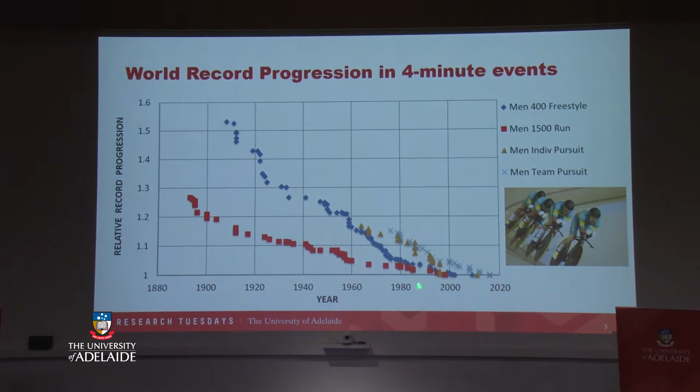So what I've prepared here is a slide with world record progression. This shows the world record for four different events, and I've divided that world record, shown across there for each year, by the current world record. So what we see here for the men's 1500 metres running race is that they've improved by around 28% since the late 1880s. And so it goes for all the others. In 400 metres freestyle, they've improved by approximately 55%, let's say 53%. So all of these are four-minute events, or very close to that, so physiologically they're around about the same.

People's bodies are behaving in roughly the same sort of way, so they're really quite a good comparison. Here we see the 1500 metres running race, and that's a natural activity, and we're all born with the ability to run.

And we see it's a fairly flat progression. There are a few dips and bumps and flat bits due to world wars and things like stadium materials, or stadium running surfaces improving and shoes improving, but it's a fairly flat progression.

In the 400 metres freestyle, we see a much steeper rate of decline in the records, and we can attribute that to improvements in stroke technique. It's not necessarily a natural technique for us to swim, and so improvements in stroke technique have made a great deal of difference, also swimsuits and a number of other factors, and so we see a much steeper decline.

Now there are two cycling events here. One's the men's individual pursuit with the gold, appropriately coloured, and then the team pursuit with the blue crosses, and they both start a bit later, and they show an even steeper decline.

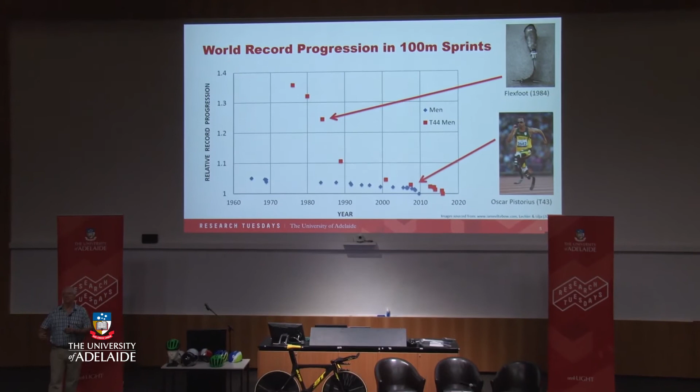Now T44 is for athletes with one leg amputated below the knee, or some other occurrence that leads to them essentially being missing one of their feet. And so they use some kind of artificial foot.

Now, up until around about 1984, essentially people used wooden legs. And so the world records were up here. In 1984, an American engineer developed a leg with a spring and a foot with a heel called the Flexfoot, and that produced that record.

Then they deleted the heel and produced something like Oscar Pistorius used, and suddenly the records dropped, and they dropped and they dropped. Huge improvement.

In fact, Oscar Pistorius, who is credited with a lot of these, as bringing this innovation to the world, in fact he went up a class to this class, to T44, and set that record. But he was just one of many athletes along the way.

What we see here is the effect of technological innovations, particularly in a sport where there are disabilities that need to be taken into account.

So, what does this tell us? Well, we're approaching physiological limits. I hope you agree with me about that evidence. And technological development now offers the best avenue for performance improvements. And in para events, particularly where the human prosthetic or machine interface is really important, we have huge potential for improvement. Okay, a little bit about riding faster.

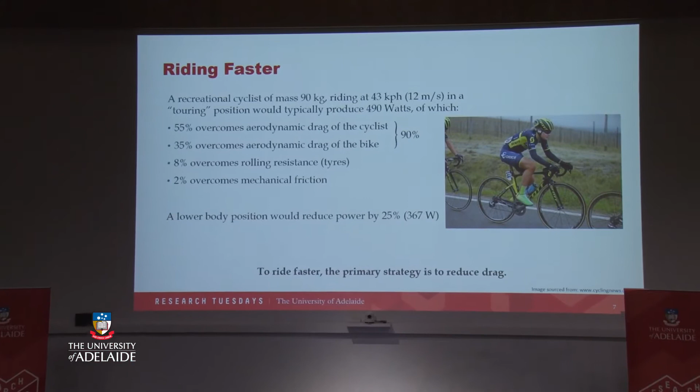So here's an example of a svelte 90-kilogram person of my size. This is really what I wish to be, riding at 43 kilometres an hour along a flat road in what we call a touring position, basically as this rider is showing us. And so a person doing that would be generating 490 watts according to my calculations.

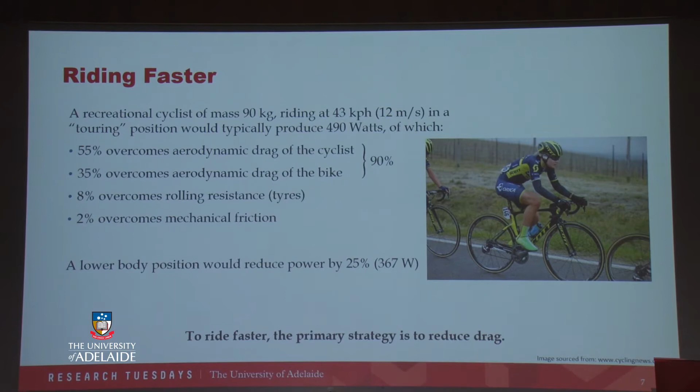Of that, 55% overcomes the aerodynamic drag of the cyclist himself or herself, 35% for the drag of the bike, and the rest is due to rolling resistance of the tyres. So this is essentially friction, if you like, within the tyre fabric, which generates heat, and then 2% for mechanical friction of the chain drive.

If the rider, of course, lowered their body position to be much flatter, they could reduce their power requirement to 367 watts, which is, of course, what most cyclists would do.

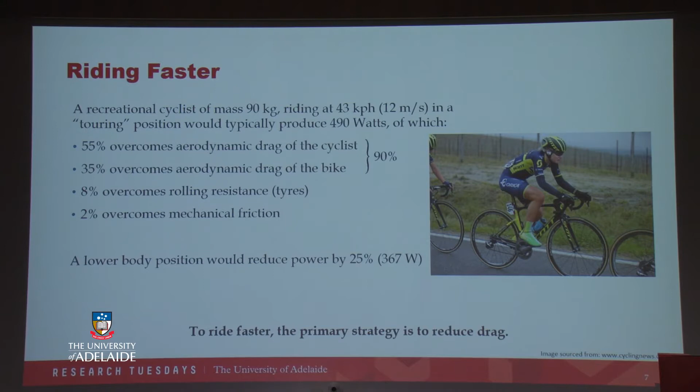What we learn from this is that to ride faster, the primary strategy is to reduce drag. The major component of the total power output of the cyclist is going into overcoming aerodynamic drag.

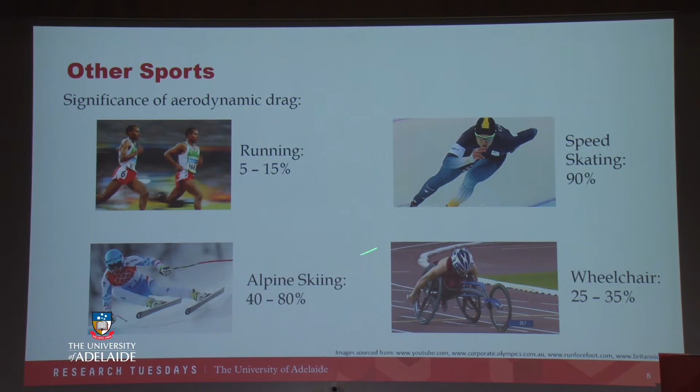There are other sports where this is significant. Running is not so significant, due to lower speeds. Speed skating has similar speeds and position, so a similar proportion. Alpine skiing is somewhere in between, but generally very high due to high speeds. And wheelchair racing doesn't have quite such high speeds, but is still surprisingly fast.

So a reasonable proportion, a significant enough proportion to be worth improving.

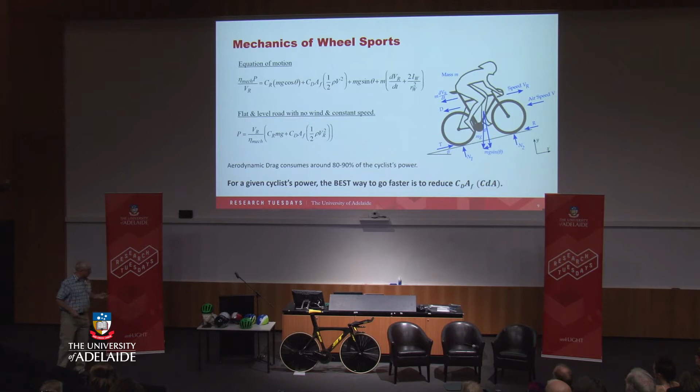So in the end, it's really quite simple. The most important part is CDA. We just need to minimise CDA, and we will minimise the forces on the cyclist. So the best strategy for improvement is to reduce CDA. So how do we do that? Well, the first thing is we reduce A.

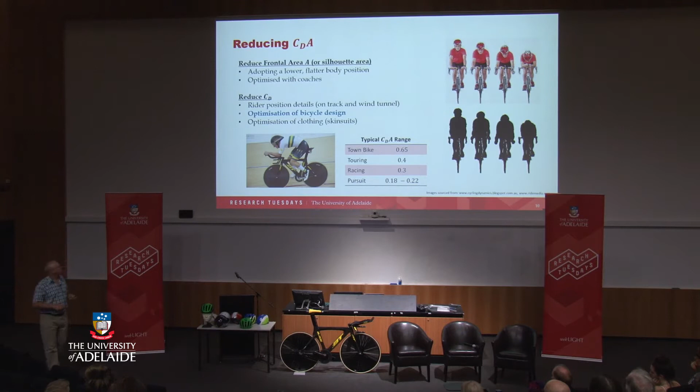We can also reduce the CD, the drag coefficient. That relates to the shape of the flow around the person or object. If the flow remains attached to the body and is very smooth, generally CD is low. If it separates away and produces a large eddying mass of air behind, the CD is large.

So we can control that by changing the rider position - the frontal area is changed by changing the rider position, and that's optimised with coaches. We can also reduce the CD by changing the rider position, things like the angle of the arms and the positions of the hands. And we can also optimise the bicycle design, and the clothing, the skin suits.

Sprinters on the track produce more than 2,500 watts, even 3,000 watts I've heard reports of. Anna Meares - I read an article that said Anna Meares produces 1,800 watts. She may produce more than that for all I know, but certainly that's a very, very impressive figure.

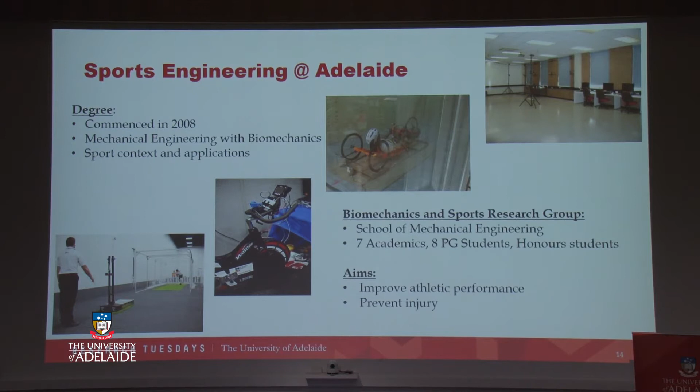We also formed a research group, the Biomechanics and Sports Research Group. We have 7 academics, 8 postgrad students, and a steady stream of honours students every year working on projects within that group. Our aims are to improve athletic performance and prevent injury. It's not just about elite sport - it's generally to improve athletic performance, and prevention of injury is really part of that.

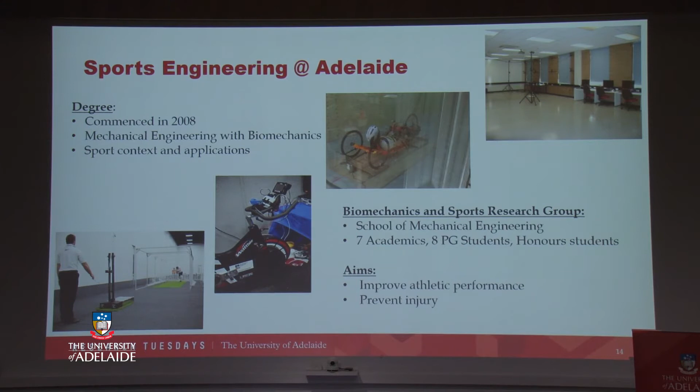That's all of us - I won't talk about who all the people are, but we have a good range of skills within our group of academics. We have a group of fantastic postgrad students, and we also have other contributors from within our postgrad numbers, work experience students, all sorts of people who've really helped us move forward.

And we have very strong collaborations - with the Australian Institute of Sport, Cycling Australia, the South Australian Sports Institute (SASI), and the Australian Paralympic Committee. All of these organisations work with each other in various ways - it's really a big collaboration. We also collaborate with Scott Sports and Bora Hansgrohe, and through Cycling Australia with CASC and a local engineering company, Askell. So it's all very, very fruitful.

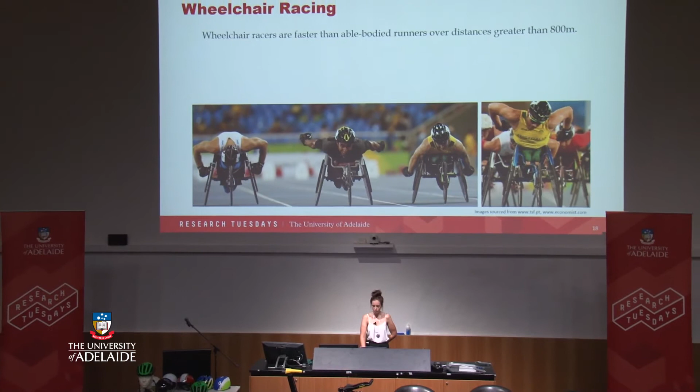Athletes commonly assume a kneeling position and use a striking motion. It's important to recognise that athletes don't actually grab the wheel, they're just hitting it. These athletes can reach really high speeds, and in fact over distances greater than 800 metres, wheelchair racing athletes are faster than their able-bodied counterparts. There are two main schools of thought for what propulsive technique athletes should use.

As Richard has already highlighted, at high speeds aerodynamics are quite important. The athlete on the left of the slide uses a propulsion technique advantageous for aerodynamics - they stay low, however they compromise how much time they're contacting the wheel and therefore how much force they're transferring to the wheelchair. Alternatively, athletes can use a position which promotes power generation, shown on the right of the screen. For this position, athletes substantially compromise their aerodynamic advantage, but are able to apply greater force over a longer push range.

So an important question is: what aerodynamic strategies do wheelchair racing athletes employ? I did an analysis on the 2016 Rio Paralympic finalists, where I grouped each of the athletes into one of three classifications based on their trunk position.

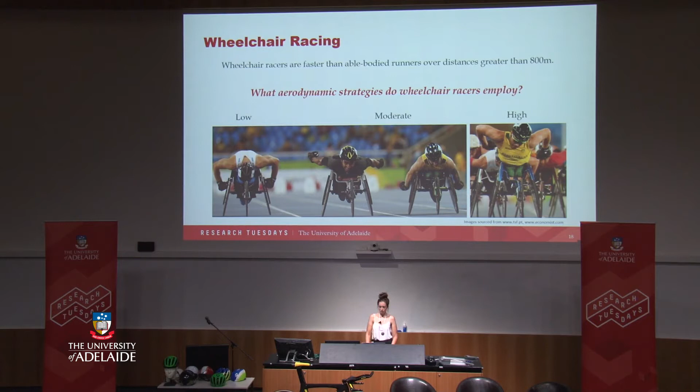One being low, one moderate, where they start to elevate the trunk, and a high position where we see large amounts of trunk elevation. Looking at the results from these finals, for females, the athletes finishing in medaling positions—1, 2 and 3—most frequently adopted low positions. However, for the males, there was a more even distribution of low and moderate positions, with high positions seen very infrequently.

So from this we could see that for the female athletes, aerodynamic strategies were important. However, these were less important for the males in winning a race, possibly due to the greater strength that males have, allowing them to overcome the additional resistive forces. So if it's not for aerodynamics, how else as engineers can we improve the performance of these athletes?

We first think of equipment. Although we've seen major advancements already in the equipment and frame design of wheelchairs, we still are limited, mainly due to how unique each of these athletes are and how limited we are in using commercially available equipment to fit their unique attributes.

So a current limitation for wheelchair racing athletes is in the seating bucket. How many of you have ever tried to run a race in a pair of shoes that are 3 sizes too big? None of you? That's what it would be like for these wheelchair racing athletes.

These athletes have either amputations or substantial muscle loss in one or both legs, meaning their seating bucket is too large for them. As a consequence, they can move relative to the seat, making their motions less efficient. It's possible that because of this movement they're not contacting the wheel optimally, and it's also possible they're getting blisters and lacerations from the frictional rubbing. None of these are beneficial.

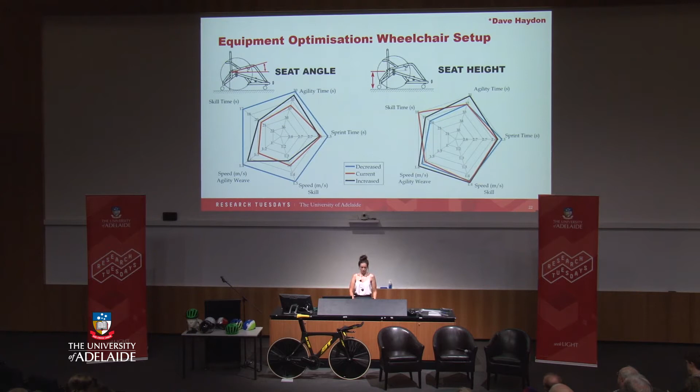From this testing, 6 elite players decided to order new wheelchairs, and the players all wanted to implement the changes before they were even given the results, demonstrating how beneficial this research was to them. There were also really excited coaches who commented on how much more effective and quicker using research was for these processes.

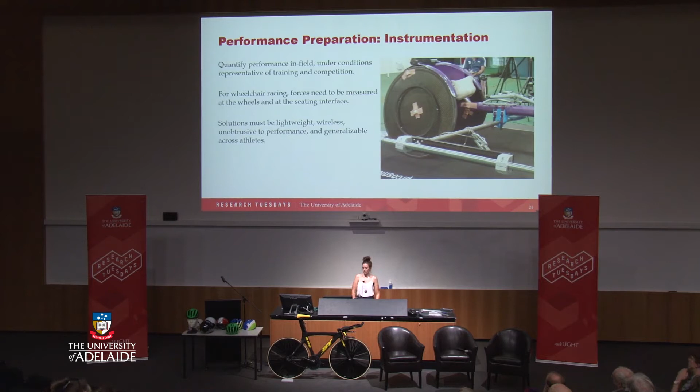To be able to identify these changes, we need to understand what the changes are. I'm sure many of you have been told in the past, practice makes perfect. But what is perfect? Without numbers, we don't know what we're trying to optimise and what we're trying to go towards. And so for those reasons, we need to start getting data.

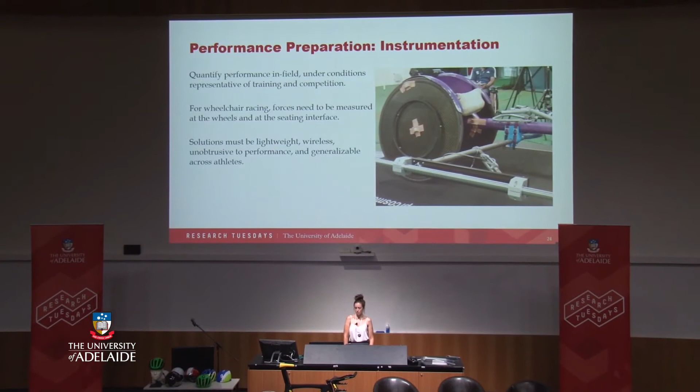That's why we're putting sensors onto a wheelchair. It's important that we can get these in field and under conditions representative of normal training and competition, so we can improve their performance under race settings. These need to be lightweight, wireless, unobtrusive to performance, and generalisable across whole teams and athlete squads.

For wheelchair racing, forces need to be measured both at the seating interface as well as at the wheels. Typically, research has looked at just the interactions between the hand and the pushrim and how to get the greatest amount of force towards propulsion. However, one thing that we looked at was what the seating interfaces were actually doing towards performance.

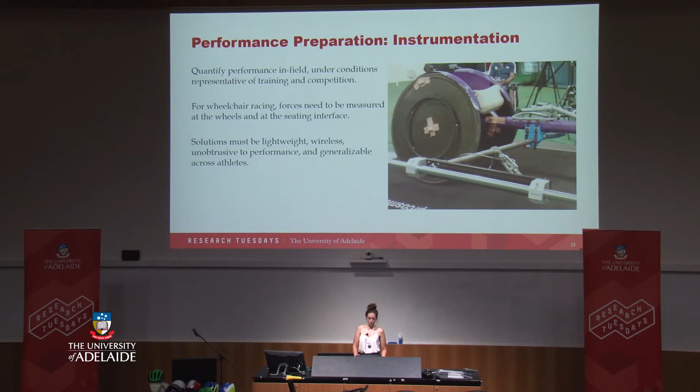So before we look at some of the results, I just want to highlight the 2 key phases of wheelchair propulsion motion. Firstly, there's the propulsion phase, where you're in contact with the wheel and applying force to the wheelchair, as well as the recovery phase, which is between each stroke, and it's where the athlete realigns their body ready for the next stroke.

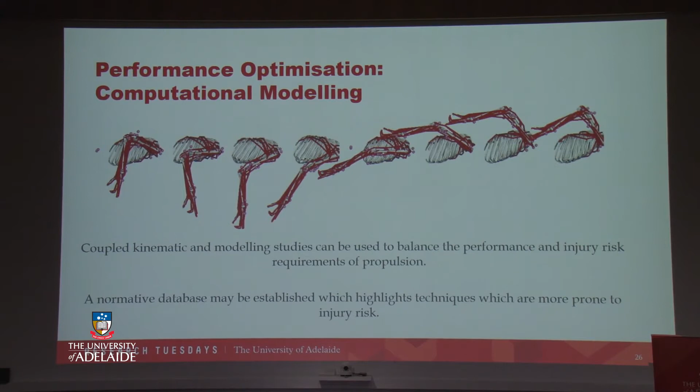Instrumentation on its own can help with defining the efficiency of a motion. However, it's also important to understand the injury risks associated with a motion. So with computational modelling, we can start coupling the kinematics, so the movement patterns, with the forces that athletes are applying. And with this, we can start balancing out the performance and injury risks of motion.

So we can see in the slide behind me some graphics of a simulation of a wheelchair racing propulsion, with the red elements representing the muscles. When you start looking down at a muscular level, we can look at what muscles are being recruited for a task and understand the efficiency of the motion and whether we're recruiting the largest and most effective muscles. And we can also see how much strain we're putting each of them under and whether we're likely to put them under a risk of getting a strain injury.

From this sort of research too, we can start developing a normative database which can help us understand which techniques are more prone to injury risk and which techniques are more competitively advantageous.

So what we were able to find between this case study was that the less experienced athlete had higher propulsive forces but a lower velocity, which was indicative of them having a lower efficiency motion. However, this athlete was also able to have lower joint reaction forces, and so somewhere in their kinematic patterns, they were able to reduce the stresses at the hands and have a safer motion with less risk of injury.

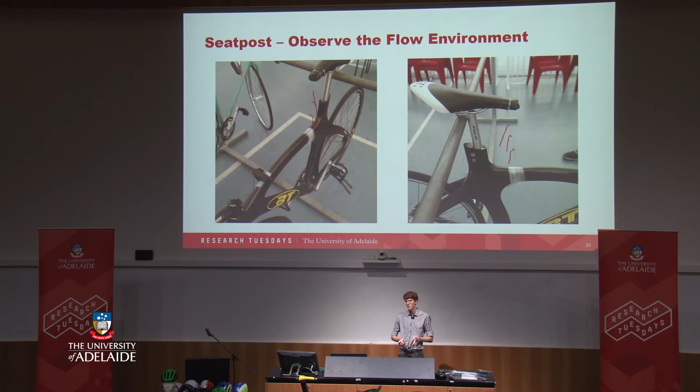This is a very simple experiment, but it works incredibly effectively at seeing what actually happens. On the right, we've got wool tufts stuck on a fishing wire between the saddle and the top tube. On the left, there's a GoPro stuck along the top tube, so this camera looks straight back at the cyclist's legs. This is what we see. It's not the most flattering of images, but it provides a very good indication of what the airflow is actually doing. We can see the red wool lines go back and forth. The airflow remains pretty much the same magnitude and velocity, but it is highly periodic in its direction. It matches the pedal cadence, and these guys are pedaling at over 120 RPM, so it's oscillating back and forth at quite high speeds.

Now the problem is, track cycling takes place inside an indoor velodrome. So the basic assumption everybody made was they're riding around a box in still air. However, we can clearly see here the air is not still, at least for this section of the bike anyway. So all previous testing done on the seat post would have considered just straight airflow. We can see that it's obviously different, so this will affect our results.

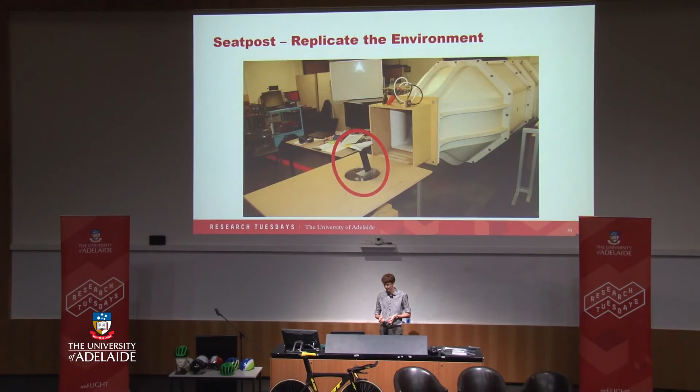So we replicate the environment in a wind tunnel. This is a very small wind tunnel, and it just has the seat post in it, so we've got no legs or bike, but it's really all we need. We have a small wind tunnel and small components so we can tune in on just that area and see what's actually happening at that one point. Here we can turn the seat post through a number of different angles, so we have straight airflow onto a turning seat post. On the track, we have a straight seat post with turning airflow. They both have two different methods to get the same result.

This is pretty much our experimental process. We start with the baseline result. We have a wool tuft, which is just a little bit of wool on the end of a stick, and that can actually show how the air is going, because air is invisible and we can't see what we're doing. We can directly measure the drag force live, straight out, so we can make some changes and see what it does.

We have a lot of fun with plasticine. It's a bit more science than giving a toddler plasticine, because we can mould different shapes to what we want. We can experiment with the wool tuft and see the live drag.

Once we have a bit of an idea, we can get into 3D printing. We can create new profiles, essentially creating an aerofoil, the exact same as what you do for aircraft wings.

I created an entire computer program that used 70-year-old equations to create aerofoil profiles to make a new seat post, and we automated this so that we could be in the tunnel one morning, decide we need to change something, and within 10 minutes we'd have a new model. 16 hours later on the 3D printer, we'd have it ready, and the next day we'd be back in the tunnel testing a new idea.

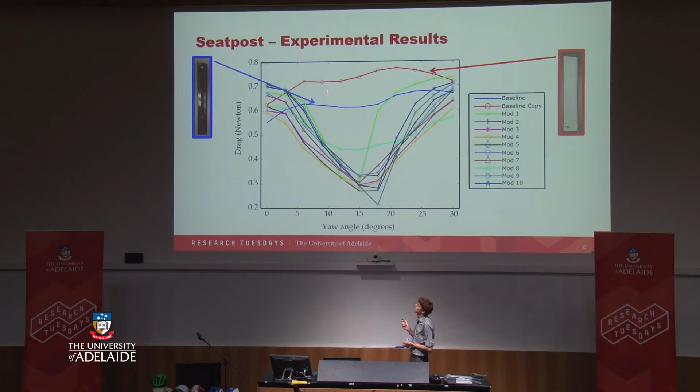A finished product that's done nice and smooth should always be better. So all our other results should really be dropped down by the difference between those if they were going to be made in a final product.

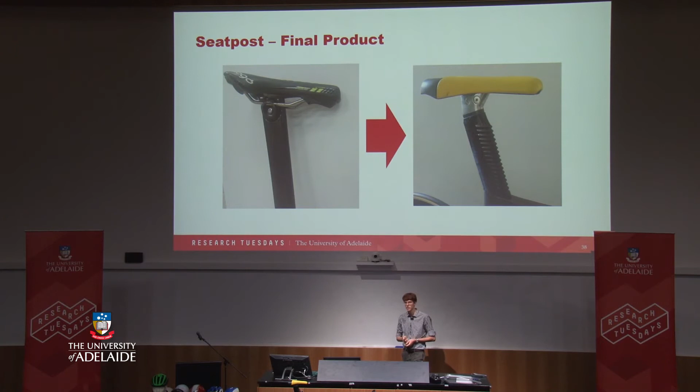And the final result, with a new saddle designed in collaboration with Cycling Australia and Adelaide Uni, we're able to effectively halve the drag of a seat post, which is quite a significant result.

So moving on to the socks, this is an interesting little story that I quite like because lots of people ask, why do you bother? Well, at this level, every millisecond counts and our legs are remarkably inefficient, and we can make a massive difference, as you will see in the end.

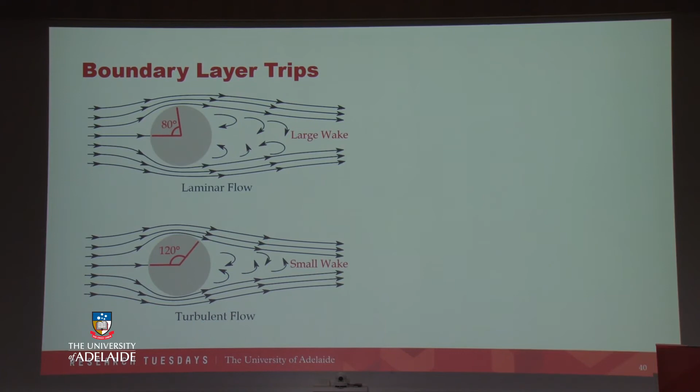This large wake is slow-moving air, and the larger it is, the more drag it produces. In contrast, if we have turbulent airflow, it separates much later, so we have a smaller wake which reduces the drag. So in cycling, we want turbulent airflow.

And how do we get that? We trip the air. We put a little bit of obstacle along the surface, and we can add more energy to the air, increase the mixing, and reduce the size of the wake.

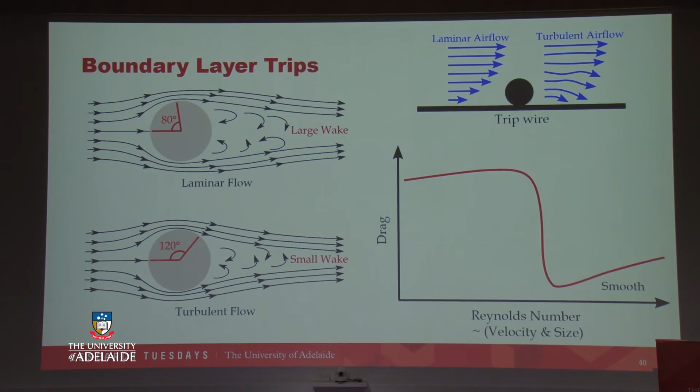So here is a graph of the drag of a cylinder versus the Reynolds number, which is the velocity of the air and the size of the object. We can see at low velocities it has high drag, but it reaches this significant point where it drops suddenly and the drag decreases, known as the drag crisis.

Except in cycling, for the thigh, which is a larger object than the calf, the thigh is right on the drag crisis, so we reduce the drag significantly. That's good. But for the calf, it's right in the high drag area.

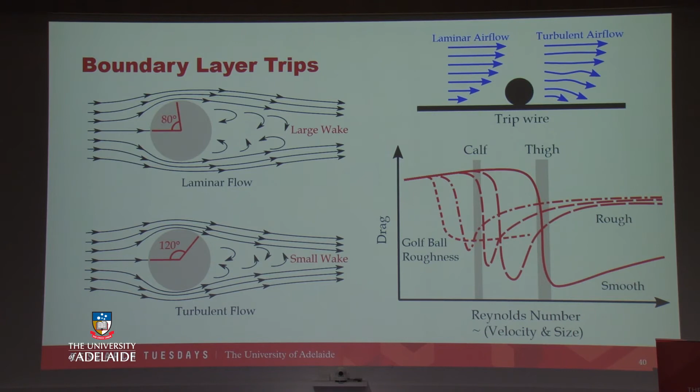But if we add a little bit of roughness and keep adding a bit more, we can move that drag crisis to happen at a lower velocity. So we end up having the area of the calf at low drag. This is what we want, and this is what's used throughout different areas of cycling.

For us, we worked with socks. We put a wire on the edge of a sock and moved it about to find the exact right position, and we got significant drag reductions. But move it a centimetre or so, and there would be no drag reduction at all. So the position was highly important.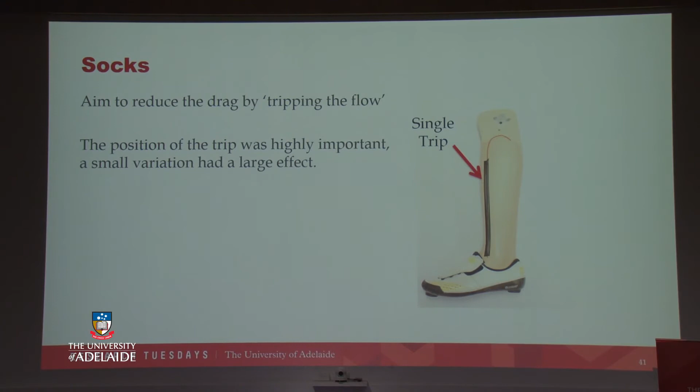Lastly, we did the cranksets. The cranksets are the point where you add the pedals, you add power to the bike. The interesting thing about them is they rotate 360 degrees, which means it's very hard to do anything aerodynamically efficient. So we had a testing setup in a wind tunnel.

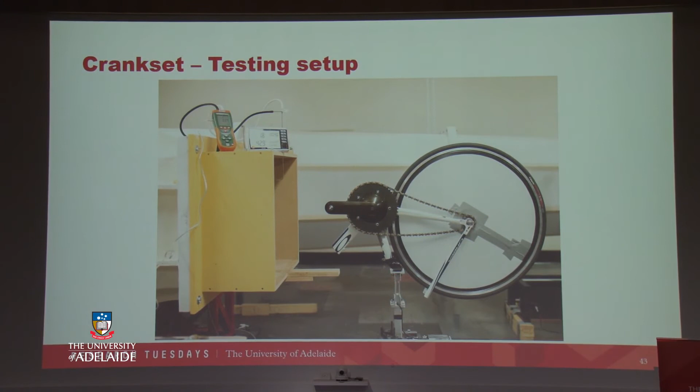Once again, small wind tunnel, half a bike, but it gives us all the information we actually need to know. We'd find a drag reduction at, say, position B, and it would be all good. We'd move to position C and it would be worse than before. So the hard part here was trying to mould the cranksets to work at all 360 degrees.

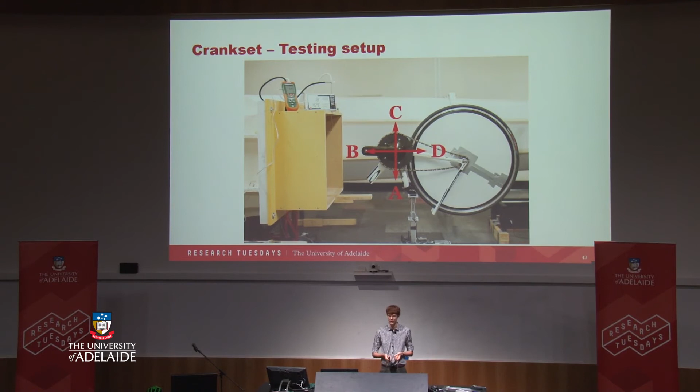We once again had fun with plasticine. Some of these ideas are quite frankly ridiculous and would never actually be implemented, but they allow us to see what's actually happening. We can mould it on the non-drive side to look like the drive side. We use the little humble wool tuft - Richard's favourite wool tuft right there - and we can see what's actually happening to the airflow. This gives us a good idea of what's happening, why it's happening, and how we can influence it.

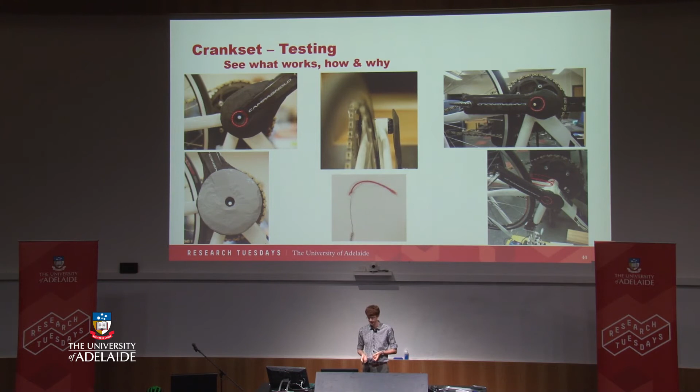Our final result was to keep it very, very simple, but that's the whole point. We cleaned out everything. We found particularly the underside was important, as we wanted to clear as much space between the cranks and the frame so the airflow had room to move around.

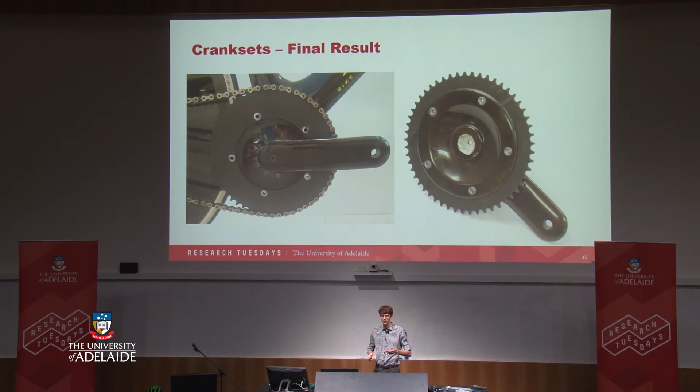Collating them all, we actually got a 27 watt reduction, which is ridiculously large for the amount of work we did. This is a 2-second difference over a team pursuit.

However, the results don't always translate from the wind tunnel to the track for a number of reasons, because the wind tunnel isn't always fully representative of the track, and we're always dealing with the ideal case. That doesn't mean wind tunnels are useless - it means that's actually what they're entirely designed for. We build a wind tunnel to focus in on one area to get the biggest reduction there, and then we can apply that in a smaller manner on the track.

This leads into my PhD work, which is understanding the airflow around a cyclist in the velodrome. With this, we can translate results from the wind tunnel to the track much more easily. We need a greater understanding of the environment inside a velodrome, and this can be used for a variety of areas, not just bike design - it can be used for athlete position and coaching styles. My work involves using measurements from inside the velodrome to build an understanding of the airflow around a cyclist, and will hopefully be used later in the wind tunnel or in CFD to reduce the drag of the cyclist. Thank you.

I'll pass on to Richard.

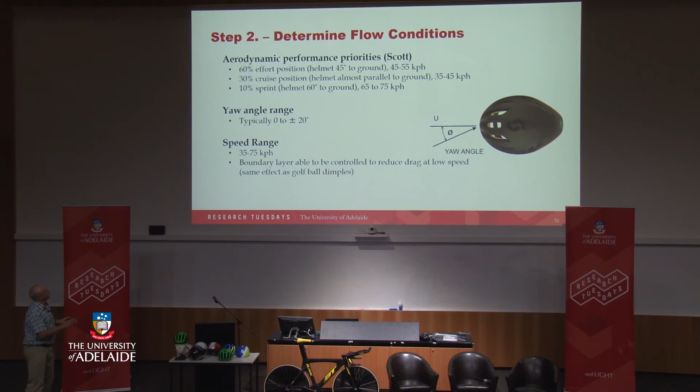As Sean said, at the start of each of these projects, you have to work out the aerodynamic environment. So in conjunction with Scott, we defined three positions of the head and helmet. First one is the effort position — that's the position of the head and helmet when a rider is really pushing hard, so their body will be flatter and they'll be facing a little bit more down, head down.

Relatively high speeds there, and the priority was 60%. If you want to put a weighting on all the things we were looking for, 60% of the priority was on that position, 30% was on the cruise position — that's where you're sitting in a pack of riders, heads up a little bit, generally going a little bit slower. And the other one is the sprint.

This is a Caleb Ewan kind of thing — head down, body really flat, going hell for leather at top speed. So less preference there, but I had my secret preference. It went 0, 0, 100 because I wanted Caleb to win, and he has.

The other thing is the yaw angle range. When you're riding along, there are environmental winds, and those winds turn the airflow to the side — that's called the yaw angle of the flow. So we considered on the road up to about 20 degrees of yaw angle, and we tested at those ranges of angles.

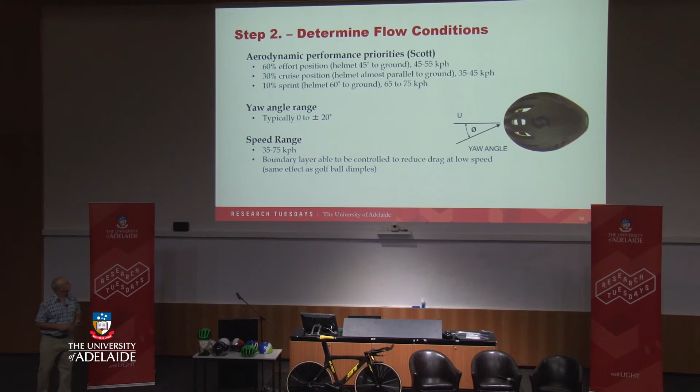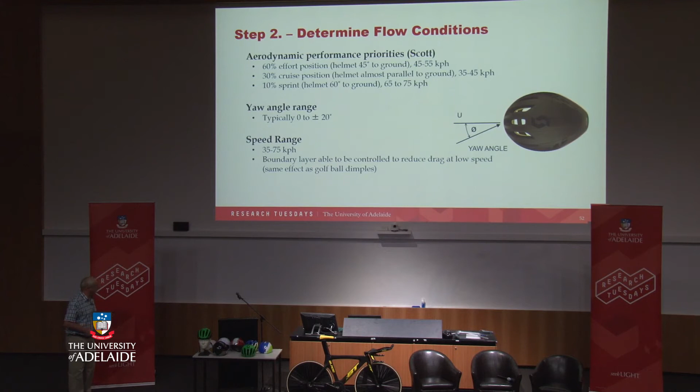Now, we had a range of speeds there, 35 to 75 kilometres an hour. And what was actually really interesting, and it's actually a fantastic result, is that with the helmet at that normal size and speed, you can actually control the boundary layer, as Sean pointed out, by using roughness. Like with a cylinder or a leg with a sock and so forth, you can control or at least reduce the drag on the helmet by using roughness, or, as shown here, little grooves in the surface, which effectively produce a similar result. So we have a lot of opportunity to control the flow and reduce the drag.

Now, I'm an aerodynamicist, and I don't really do much heat transfer work. So I had a lot of fun generating a mathematical model which I used to essentially take my brain out of my lack of understanding out of the equation.

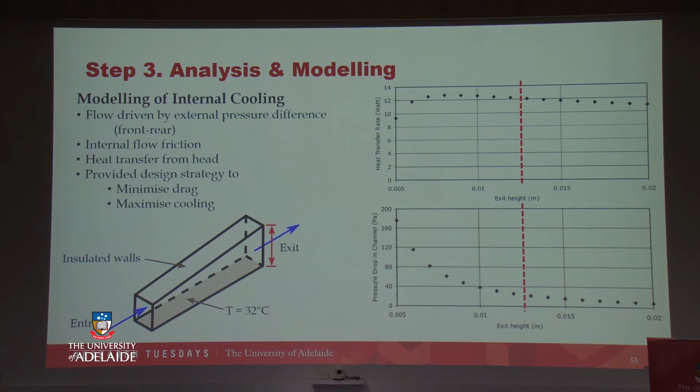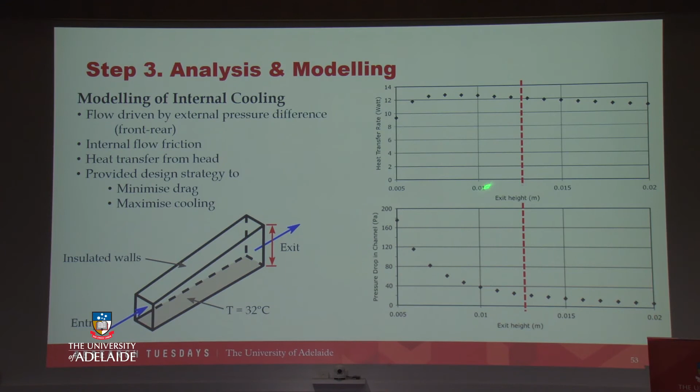Now, it's a bit hard to read what those axes mean, but what we actually see here is the heat transfer rate, in other words the cooling effect, versus the height of the exit. The inlet was 0.01 metres, or 1 centimetre, high, and we find that when the exit is half of that, we have low heat transfer rate, and we actually get the maximum when it's about 7.5 or 8, and then after that it drops down, but not very much.

The pressure drop in the channel really represents the resistance to flow through, and we want the minimum resistance to flow through so we get the maximum flow. What I found was that if you diverge the channel from 0.01 to roughly 12.5 millimetres at the back, we get actually quite a large drop in the resistance, and so we get a good flow.

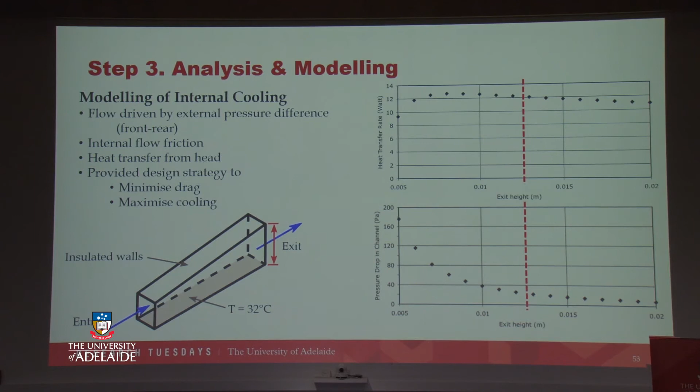So around about where this red line is, you get really good heat transfer, good cooling, and you also get very little resistance to flow. So that's kind of the sweet spot, that was my determination. So if we actually just diverge those channels a little bit, we can have our cake and eat it. We can have good cooling and also low drag.

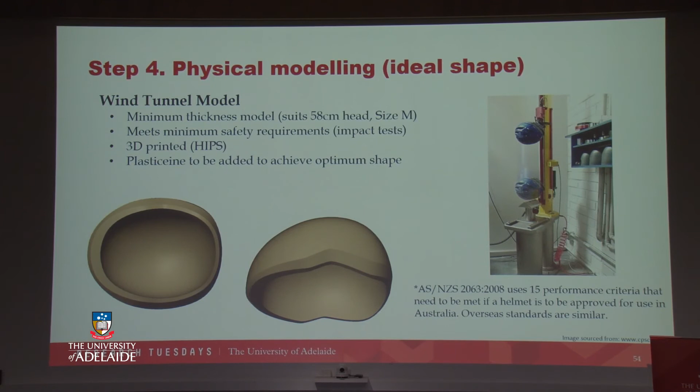Okay, so next Scott sent me a minimum thickness helmet. This was actually a drawing, a design of it, which we then 3D printed. 3D printing is fantastic. And we used that because with this minimum thickness helmet, we knew that we could meet certification.

We knew we would have a helmet that was strong enough, so when they do their certification drop tests, it would actually produce the right protection for the rider's head. So then we got this helmet and used that for testing, and we then added material to that. If you add material, you make it safer, and you also have the opportunity to reduce the drag. So that's what we tried to do.

And with this model, basically I used plasticine. I love plasticine. This is actually Lars Teutenberg, who used to be at Scott.

He showed us the positions they wanted. We replicated that with our wind tunnel model, our first head form, and these are the positions: cruise, effort and sprint. As you can see, for the sprint, the head is down quite a lot. This is our very simple initial model, again using the small wind tunnel, but it's actually the perfect size for this sort of work.

You can see the setup there. There's the head with the helmet on it, and it's connected to a load cell down there. That measures the drag on the head and helmet to an accuracy of 0.015%. It's pretty much the most sensitive and lowest error load cell you can buy.

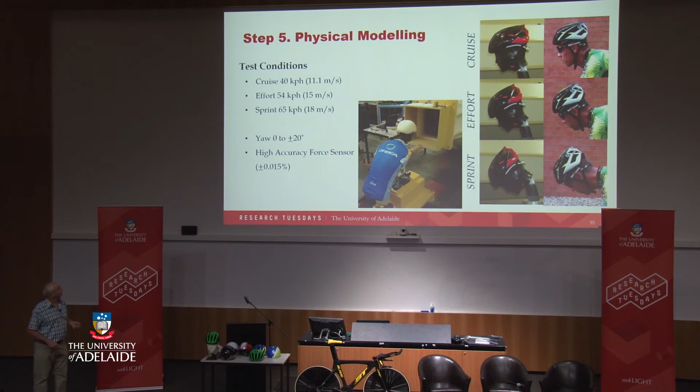And we ran that at various speeds into various positions and various yaw angles in the wind tunnel. I would investigate the flow and explore where flow separation occurred and where the flow actually travels around the surface. And I looked at different places to put trips and all sorts of things.

Once I understood what that was doing, then I worked out where to start adding plasticine. I built out a tail that was only built out just far enough to prevent all of the bad things from happening, and added a number of other bits just to get the contour right. The thing about this is we had live drag measurements, so you could hack a bit of plasticine off, and if it made things worse, you could just put it straight back on again.

There were no penalties for making a mistake, and it allowed the flow to actually teach you what was happening. And of course, you had to try and understand why the changes actually had an effect. So it wasn't a random process, but it was live, and we could also record the results for later processing.

We did air velocity measurements using velocity probes around the helmet to work out where it was fastest and slowest, used plasticine and protrusions and so forth. That's some of our live feed up.

Now, preliminary results, that's the cadence. That's at least this model up here versus a reference model. Quite a significant improvement—that's a non-zero axis there, but it is a significant improvement.

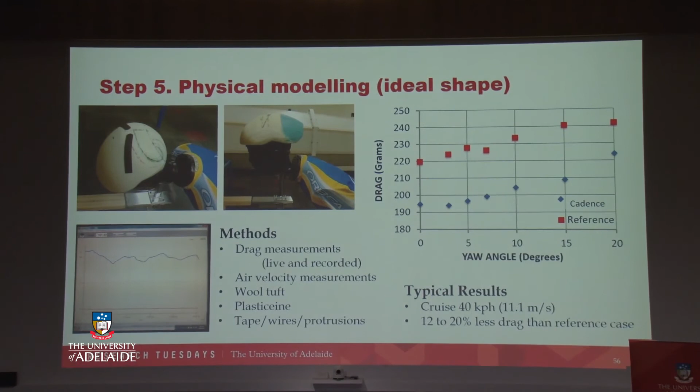But our helmet didn't have all the straps and didn't have vents and so forth. So the next step was to take that shape and actually build it onto an existing helmet. So I basically filled in an existing helmet and plasticined it up.

And produced this. I played with vents, varied their size, put them in different places, and tried to optimise it all for the various flow angles and so forth. I formed the internal channels and maximised the ventilation flow, and also found that as you maximise the internal flow, you reduce the drag.

So the vents actually produce very little drag. And we also found that no top vents are required. The best approach is, in fact, we found, is just simply to have the air going in the front and out the back. All the vents in the middle don't actually help very much at all.

But one of the really good things about this is it was a working helmet, so I could put it on my head and ride home with it and then back to work each day. People just thought I was a bit mad wearing a plasticine helmet. But it was actually really informative because I learned how well the helmet worked as a real product.

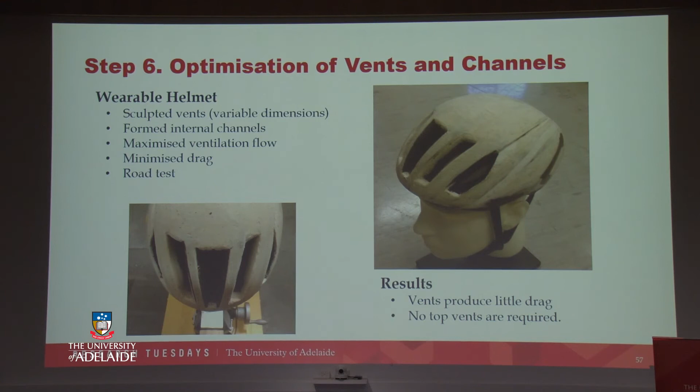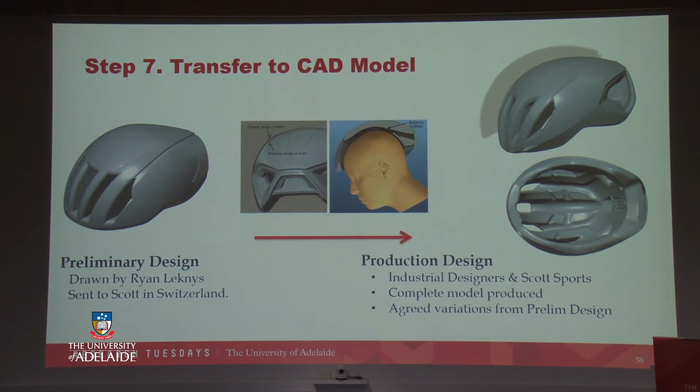Then Ryan Leknys, who was one of our PhD students at the time, now finished, turned that into a CAD model, computer-aided design model. He's brilliant with CAD, and he transferred that into a fantastic shape, which then was sent over to Switzerland, where their industrial designers and safety structural designers started working with it.

There was a lot of interplay between us. We had a lot of discussions where we talked about trim designs and getting clearances and all this sort of stuff so that we could maintain all of the optimum design for best performance, aerodynamic and ventilation performance.

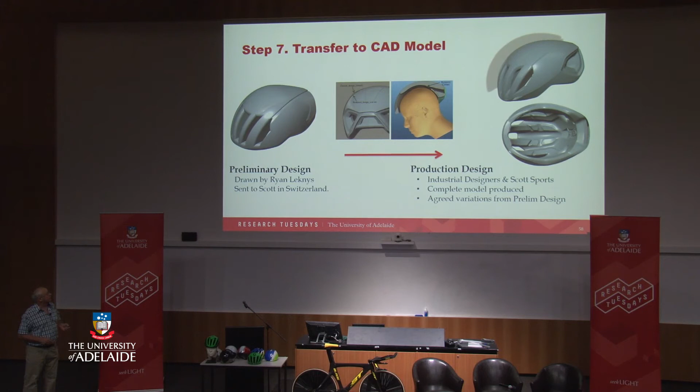So it was a kind of a discussion. Sometimes it was a bit of a competition between aesthetic design and aerodynamic requirements, but I think in the end we all won, and it produced a fantastic design. That's their version of it.

Then, once they had pre-production samples, we launched into a testing campaign, and Sean and Henry were involved in that—Sean, who spoke before, and Henry, his partner from his final year project.

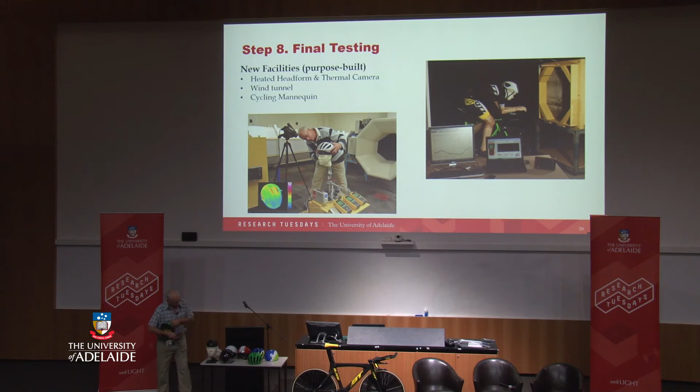We developed a heated head form, shown here. It's a head with a 30-watt heater inside and temperature sensors all over. So we run that up to temperature, put a helmet on, test it, with the airflow running in the wind tunnel.

50 minutes later, everything's reached an equilibrium. We measure all of the temperatures using thermocouple loggers all over the surface, and then we also grab thermal images. So we can do a lot of diagnosis about where there are hot spots and cool spots on the helmet, and we can understand a lot about the airflow.

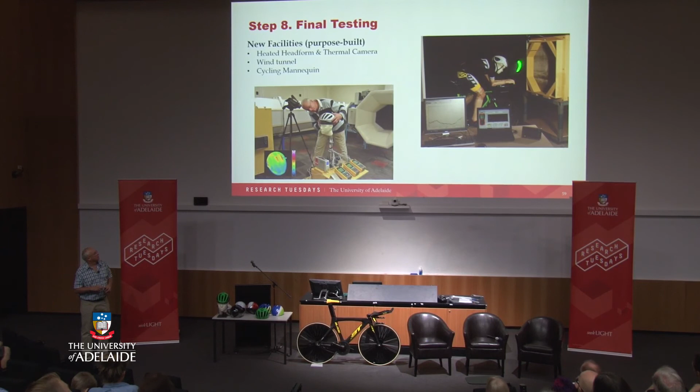So we also developed a small blower wind tunnel for use just here at North Terrace, so we could test at any time and do it essentially in secret. And so we did the testing on this model.

So here is the result for the effort condition. Now, what I haven't mentioned so far is that there was a version of this Cadence helmet, the final Cadence helmet, and that is with plugs.

Here are the results for the drag. Now, the drag is—in engineering, we would normally measure that in newtons. But in cycling, people tend to talk in grams, and I think most people have a bit more of an understanding of grams, so I've left it as grams.

So here's the drag in grams of the head and helmet—not just the helmet. When you put a helmet on, you're still measuring the drag of the head and the face and so forth. So there's the bare head. There's the Cadence with plugs—this is the final Cadence helmet, but with plugs filling in the vents.

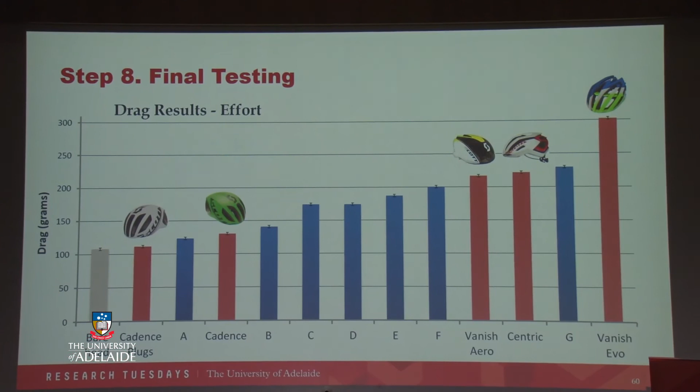And this is the lowest drag helmet that we tested, and it's barely any more than the bare head. This was one of the competitor helmets, which incidentally has very low drag, but the cooling isn't nearly as good as the Cadence without the plugs.

So in the Cadence we sacrifice a tiny bit, at least in this effort condition, in terms of drag, but we gain a whole lot in ventilation, and that helps the rider to perform. Here are a whole lot of other competitor helmets.

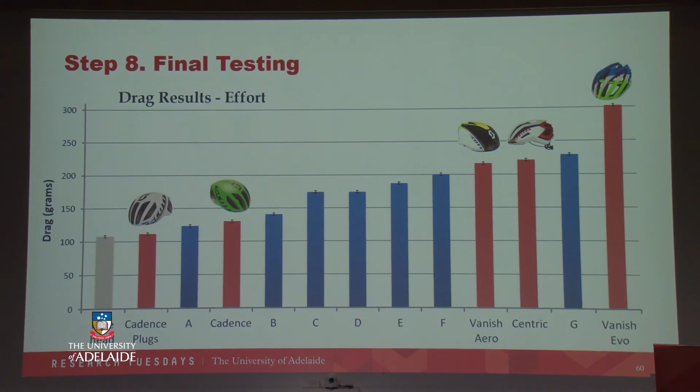The Vanish Aero, that's this helmet here. I actually helped develop that, and that was the previous aerodynamic helmet. So we replaced the Vanish Aero with the Cadence helmet here.

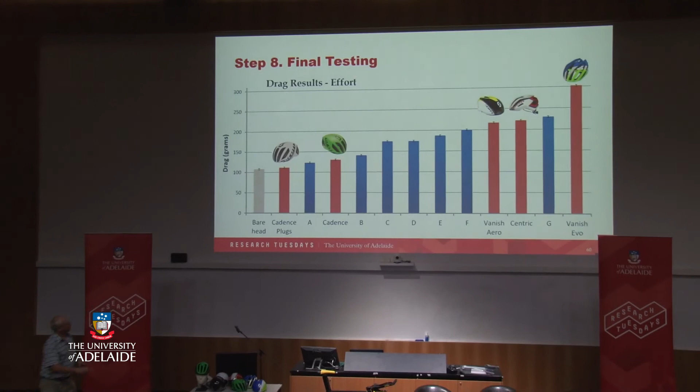So a significant improvement. The Centric I haven't mentioned, but that's a kind of sister helmet to the Cadence. It was developed at the same time, and its design was informed by the Cadence development, although we didn't actually do any testing along the way.

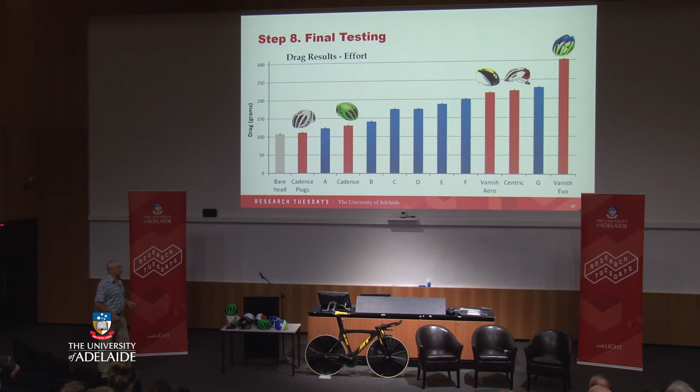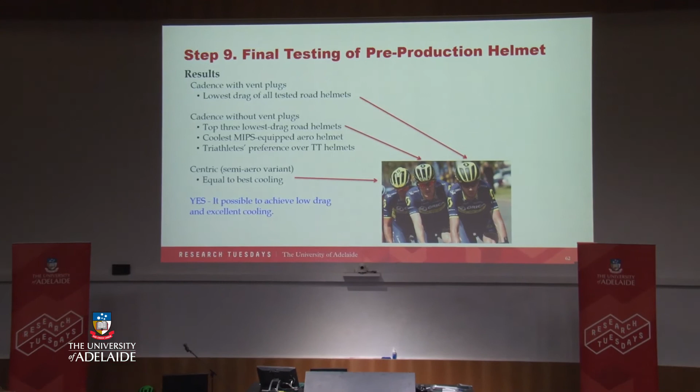Okay, the result of this development process is now we have three helmets in one, from one development process. We have the Cadence with the plugs, shown here, conveniently all in one picture. This is what was the Orica Scott cycling team, now Mitchelton Scott, Cadence with plugs, Damien Howson, and that has the lowest drag of any of the helmets that we tested.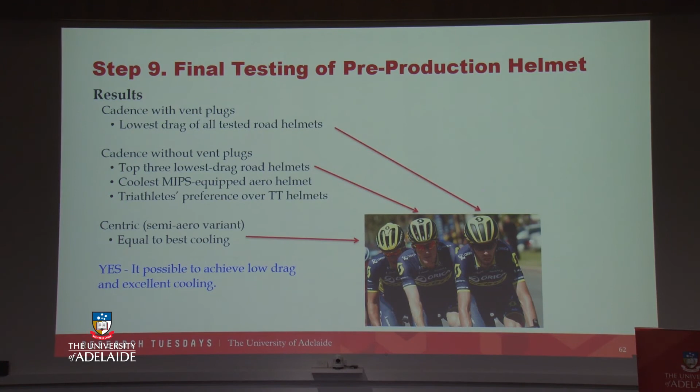The Cadence without the plugs has a lot more ventilation, a little bit more drag, and it is the coolest of the MIPS equipped helmets, meaning it's got an extra safety feature in it. It's the coolest of those helmets available, and it's actually now the triathlete's preference helmet. The British triathlon team seem to have adopted it as their helmet for the Commonwealth Games.

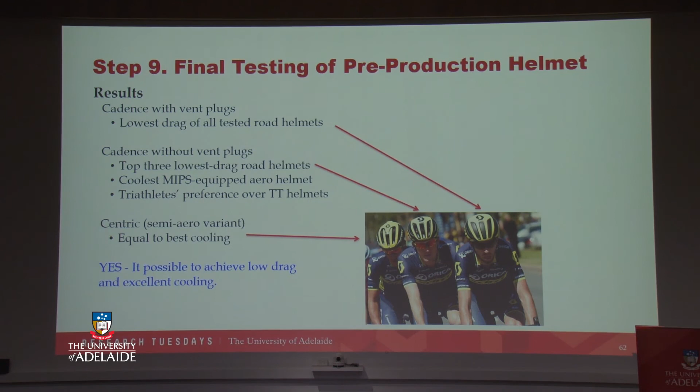The Centric is this one here following behind, and that's as well cooled as any other helmet we tested. It's an amazing helmet. So one result is, yes, it's possible to have low drag and excellent cooling.

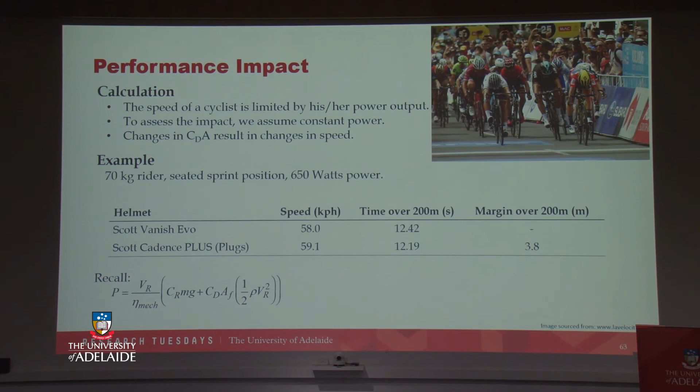Performance impact. So when you assess performance impact, it's really a good idea to take a double scenario. You say, all right, you've got two cyclists who are identical. One is wearing one helmet, the other is wearing the other helmet. They produce the same amount of power and target the same speed, and their bodies are in the same position. Everything else is the same. So speed is actually dictated by their power output.

So we assumed a 70 kilogram rider producing 650 watts, basically in a seated sprint. If they were wearing the Scott Vanish Evo, the old standard premium helmet used by the team, the speed would be about 58 kilometres an hour, covering 200 metres in 12.42 seconds. Wearing the Scott Cadence Plus with plugs, we get a speed increase of 1.1 kilometres an hour and a reduction of 0.23 seconds, a 3.8 metre margin. So two identical people sprinting to the line with two different helmets, 3.8 metres separates them. It's a huge improvement.

Okay, so this is now the Kask Mistral project, which went from 2015 to 2016, just before the Rio Olympics. It was funded by an innovation grant from the Australian Institute of Sport, and it was essentially a collaboration with Cycling Australia. My role was as an aerodynamic designer, and it was really a team effort between me and Andy Waugh and various other people at Cycling Australia.

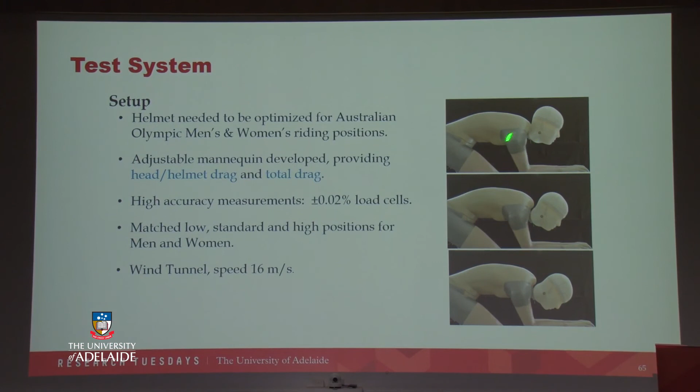We can measure the drag or the forces on the head and helmet from a load cell in the neck and also one in the base of the equipment, so that we can measure the drag on the whole, and particularly the changes from going from one helmet to another.

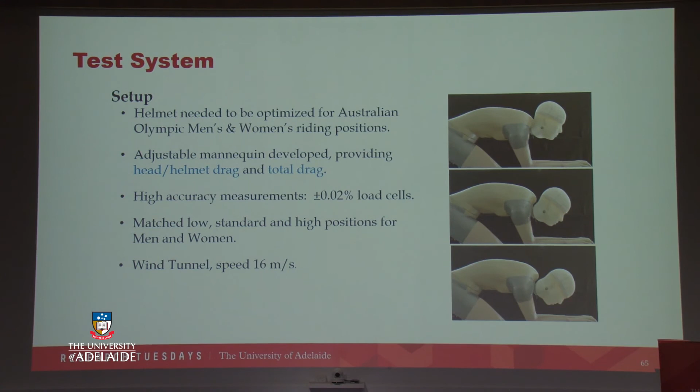Very high accuracy force measurements again, and we matched the positions of the mannequin and the head to the low, standard and high positions for the men and women in the then Olympic team. We set the wind tunnel speed to 16 metres a second, which was pretty much halfway between the men and the women, so it covered both scenarios.

We tested a whole bunch of different contemporary helmets, from fantastic ones to a really cheap model, which is actually not too bad, and used that as a benchmarking process.

The development was accelerated - we had to do it very, very quickly, and we decided the best approach was to use a Kask Bambino. This helmet is actually a brilliant helmet in its own right. It's a stumpy-tailed time trial helmet.

One of its almost unique features is it's made as a foam liner with an external shell, glued together for the final product. What that meant was we could take a standard liner, which provides all of the safety and is essentially the part that's certified, plus all of the pads and straps and hardware, and just put a new shell on the helmet.

So it takes a huge cost and time out of the whole process. That was a decision made by both Cycling Australia and us, and it made a huge difference in the project.

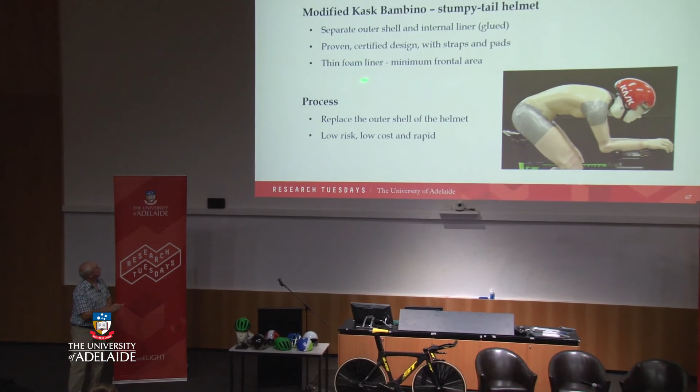One of the things about the foam liner was also that it was very thin, so it meant we could develop a helmet with a minimum size, and if you minimise the frontal area, you also minimise the drag. So the process was to replace the outer shell of the helmet. Also, using an existing helmet as the base reduced the risk of the whole process.

Wind tunnel tests were performed in January and February - I'll skip the detail - but we modified the Bambino with a new outer shell, used a lot of plasticine, tried all sorts of new design concepts, with many iterations. And this is what we ended up with.

Competitor A was really our reference. There were a couple of other competitors that were extremely good. The Mistral, the prototype we had, shown here with lots of plasticine on the back and elsewhere, and vinyl tape as well, produced a saving of 4.7 watts.

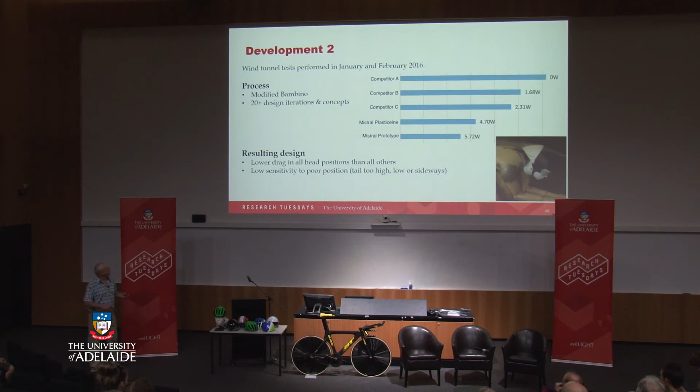Ultimately, the prototype we got back from Kask at the end did slightly better than that due to a smoother surface and better surface finishes - 5.72 watts.

The resulting design had lower drag in all the different head positions for male and female athletes, and it was also much less sensitive to position.

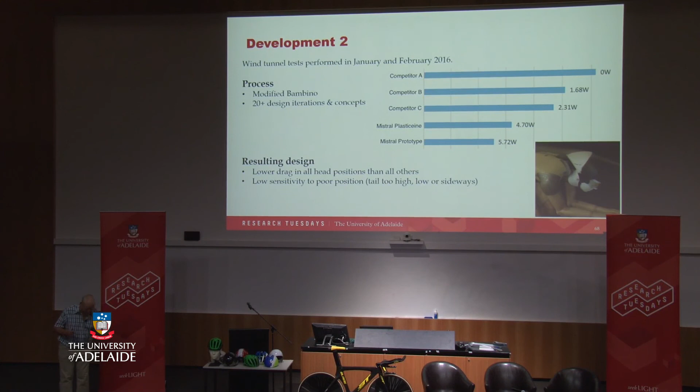When athletes get tired, they tend to drop their head, or they might turn it or even lift it. With most helmets, particularly long tail ones, that might put a big bit of tail into the air to produce drag. This is a very short helmet, and it's very insensitive to its position - so that's actually an advantage. If an athlete gets tired, it's not a great cost aerodynamically.

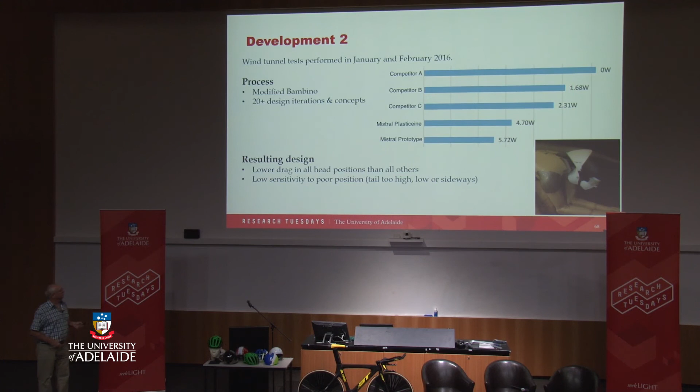Prototyping was done by a fantastic company in Adelaide called Askill, and they produced a 3D printed shell that went onto a standard CASC inner, and then we had a helmet to test. It was sent to Scott, and it came back as a pre-production prototype in June, which we then tested at 5.7 and 5.72 watts saving over our reference.

It became known as the CASC Mistral, and it was used by the Australian Olympic team, and now it's available for sale worldwide. So it's used by our Commonwealth Games athletes, but also by other teams - it was used by Team New Zealand, the New Zealand cycling team, on the track.

What's the impact? I did the same calculations as before, extrapolating from that particular speed to the actual speeds for the men and women at their world record paces. The impact of this helmet on the women's team pursuit is a speed increase of not much, 0.064, but over 4,000 metres, that's a time reduction of a second and a gain of 16 metres, quite substantial. And in the men's team pursuit, because of the higher speeds and various other things, a smaller speed increase, but again a significant time reduction and a fantastic speed gain.

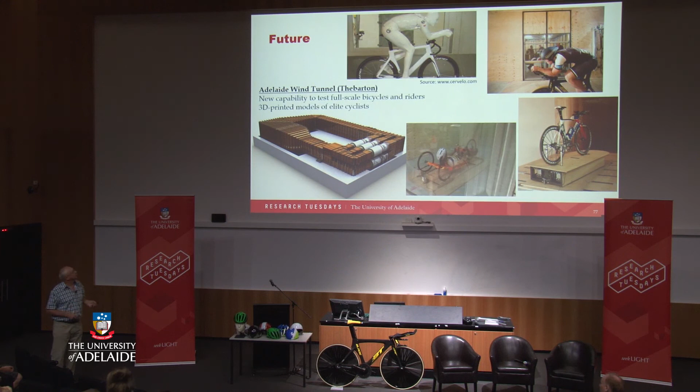Big acknowledgement to the Australian Institute of Sport and Cycling Australia, and in particular Andy Waugh. He's up there somewhere, but he has breathed life into everything that we're doing. He's been just fantastic, and so we can't thank him enough for what he's done to support us, and I hope that we have returned the favour.

South Australian Sports Institute, the Australian Paralympic Committee have all had a large contribution to what we do. Scott Sports and Bora Hansgrohe in particular have been fantastic with other aspects of our work.

The faculty has been extremely supportive and basically helped us along. The School of Mechanical Engineering allowed me to build a really noisy wind tunnel above the school's meeting room. I mean, even just for that, that's a fantastic thing.

And the ECMS and previously mechanical engineering workshops - we build a lot of our equipment ourselves, bespoke, if you like, testing equipment. We do some of it with our own hands, and we go down there and we work in the workshop alongside the technicians. They provide a lot of help, and they also do brilliant work in building our equipment for us, so we can't thank them enough either.